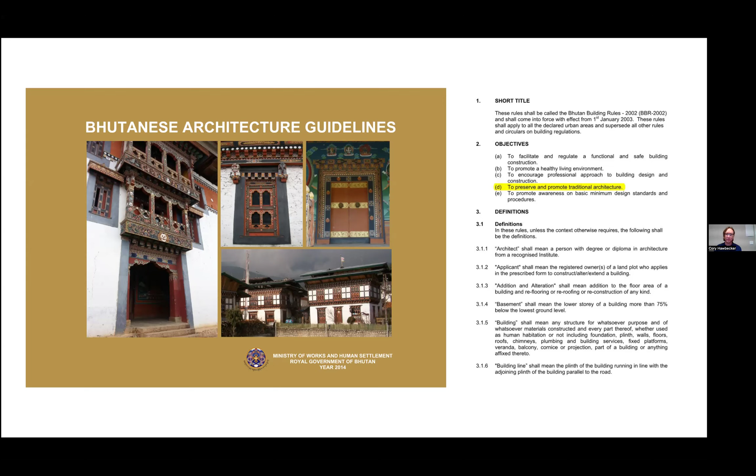The architectural forms are really these massive battered walls at the base, made of stone masonry or rammed earth, with smaller punched windows in them. And then on top of and to the side of - a lot of times you'll see at the top, this top story is all timber framed. So inside of the masonry walls, all the floors are timber framed, and that kind of pops out and explodes in certain ways on top of, or in the case of the monastery, there's a projection to the side of the rammed earth masonry, or stone masonry wall.

And above that is what's commonly called a flying roof. It's a roof form that extends out quite a bit past the perimeter of the building. And what's unique about it is a lot of times there's a lot of layering, which isn't unique to Bhutan—you see that a lot around Asia. But what's unique to Bhutan, I think, is that the roof is elevated above the ceiling of the top floor, and air can flow above that.

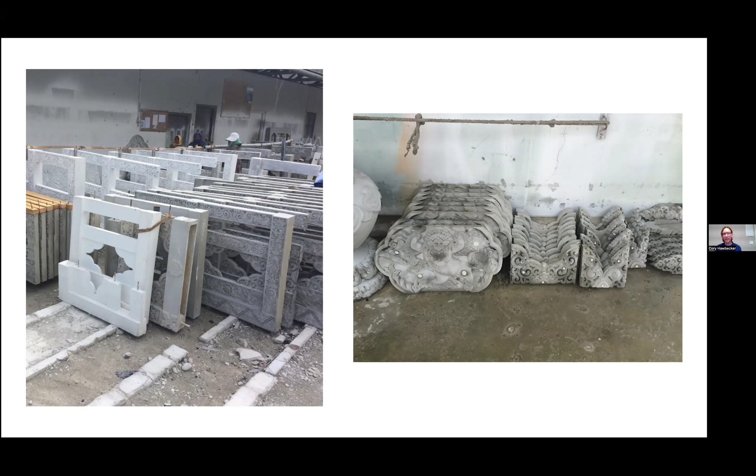All of that is sort of being supplanted commonly in the country by more modern techniques. So here, instead of actual carved wood, there's a lot of fiber reinforced concrete panels being made and put onto buildings. They're also adopting new construction techniques for the whole building—instead of masonry and timber, it's a lot of reinforced concrete frames with masonry infill, and then they stucco over that.

But as it impacts what we were doing, I had mentioned earlier that the impetus behind this was the foundation's desire to help Bhutan adapt to climate change. A component of that for much of the country is that it's kind of a colder climate. They don't really insulate their buildings. They use a lot of single pane glazing. They're really not familiar with using sealant to seal up gaps. So they've got drafty, cold buildings.

And our thought was that in working with them on the library, we can kind of move the needle in terms of sustainability and sustainable construction techniques with this project. So trying to use as much as we can of what they're familiar with and what's efficient there, but also layer on another component of insulation, air sealing, and efficiency.

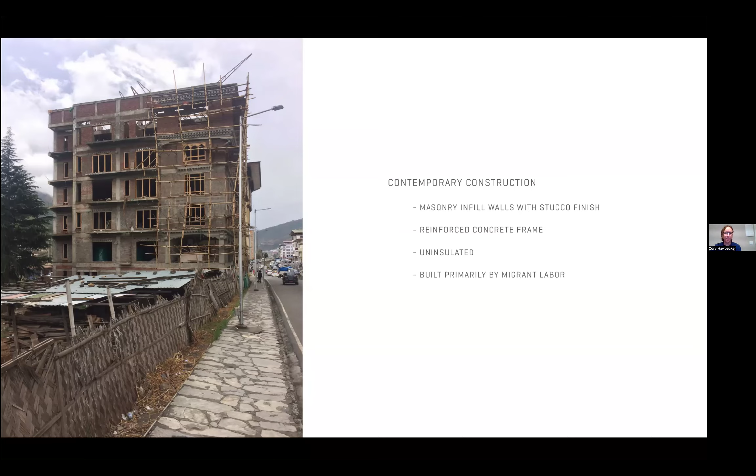So I mentioned the newer techniques—this is becoming very commonplace throughout the country. They're urbanizing quite rapidly, so they're building tons and tons of these apartment buildings with essentially uninsulated envelopes. They're also incorporating a lot of elements from India predominantly, like this mirrored glass, which really isn't effective in this climate, but it's readily available.

I encountered this especially when we were starting the project, trying to source insulation materials. Well, they bring in a bunch of salespeople from India, and they're not familiar with what we're looking for, so they're bringing us duct liner and stuff like that instead of proper insulation. So it's a lot of working with what's available, what's at hand, and what can we do. That was kind of a challenge for this project.

So, in summary, they have a strong desire to be sustainable, but they're not building very sustainably right now. This was an opportunity to elevate or do something new in the country and get people familiar with these techniques. The client we were working for had constructed a passive house and is really a believer in that technology. But Passive House is just kind of a component of a universe of high performance building techniques—that was our mission, to deploy those technologies in this project.

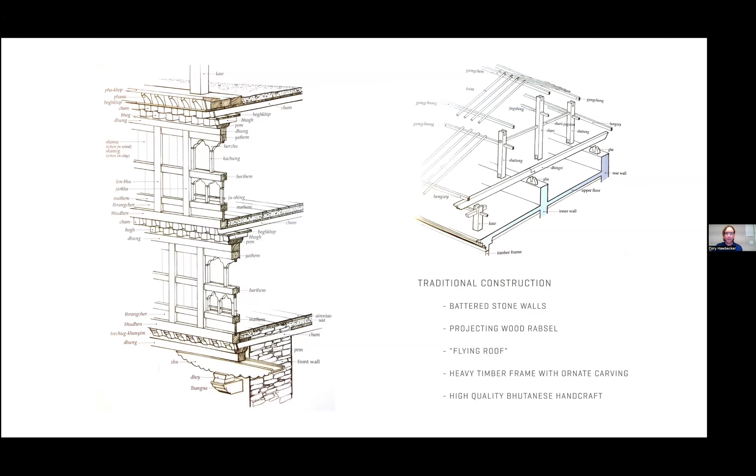So we wanted to, as much as we could, emulate those sorts of things, but implement, like I said, layers of insulation and air sealing techniques. So a lot of the early process was just me doing sketches about how that could happen.

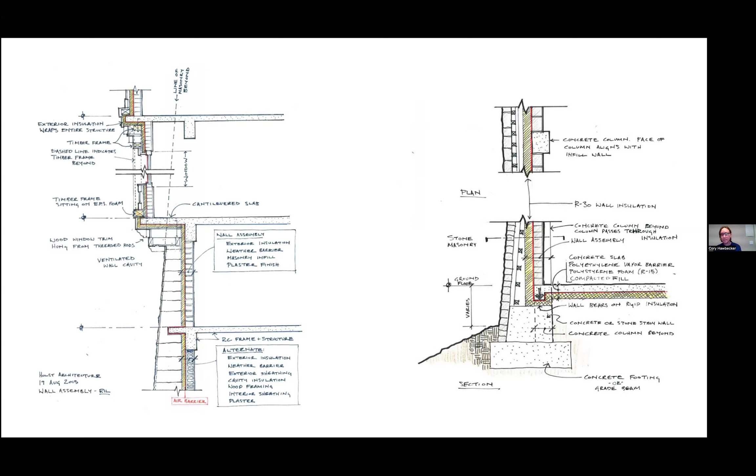So again, lowering the bar for them—still using reinforced concrete frames, still using masonry infill, and doing the things that respect the architectural heritage, like the battered walls and projecting wood framing. But hidden inside all of that, we try to sneak in a layer of insulation and air sealing. So there's a lot of back and forth with sketches, like 'can you do this?' and 'do you have that available?', working through those problems with them.

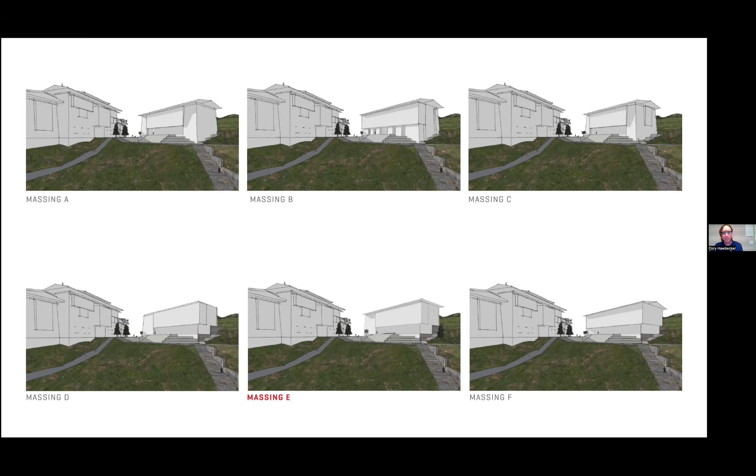Ultimately, they started building phase one, and we were asked to design the library, which is a standalone component. So we fell back on how you do high performance building—just look at the massing first and strategize around shading and positioning. Here are some images of that, and then I'll talk a bit about the detail of how the guts of the building work, but just touch on some exterior images here.

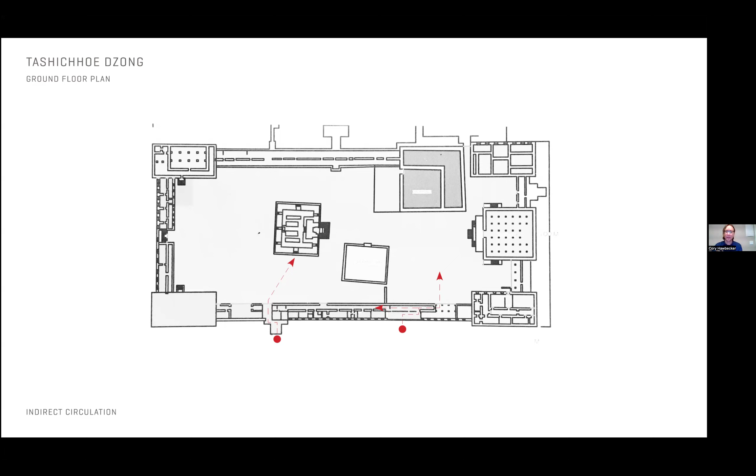When it comes to how the building is configured, we took inspiration from the dzong, the administrative monastery-fortress, as I mentioned before. As you enter these dzongs, there's never a straight route in—there's always a circuitous path because of its nature as a fortress; you don't want a big open gate into the building. Looking at that, there was some congruency between how a library operates and how a fortress operates—you don't want people just walking in, grabbing books, and walking out. There's always a control point, and we took advantage of that in the floor plan here.

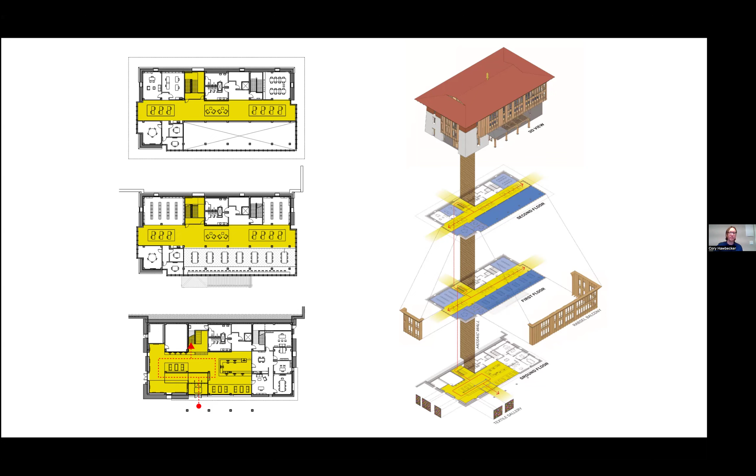Another component of the cultural inspiration we looked at was the tradition of Bhutanese textiles. They do a lot of really beautiful textile work, oftentimes done by women, and one of our drivers was to celebrate that and shine a light on what they're doing. So on the ground floor there's a textile display showing some really beautiful works, but we also tried to weave that in—pun not intended—to some of the elements we put into the design.

Also, in addition to some of those textile patterns, you see a lot of really ornate painting and decorative work on buildings, so that was another source of inspiration.

The way that manifested itself in the building was what we ended up calling the mosaic wall, adjacent to the stair that runs through the building. You can see it here on the left - it's a series of blocks of 4x4 end cuts of wood attached to the wall in a repeating pattern that goes up the entire height of the stair. With the way the shadow hits it, it really emulates some of that patterning of the textiles.

Another element we looked at a lot was the carpet of the reading room. On the right here you'll see the double height reading space, and we looked at different patterns for that. Because the materials available there are limited by what they can get from India, we found a carpet manufacturer with a selection of carpet tiles we could work with and created our own pattern. The furniture unfortunately obscures the most interesting part, which is in the center - it's red and orange around the perimeter and builds up to more turquoise and purple in the center.

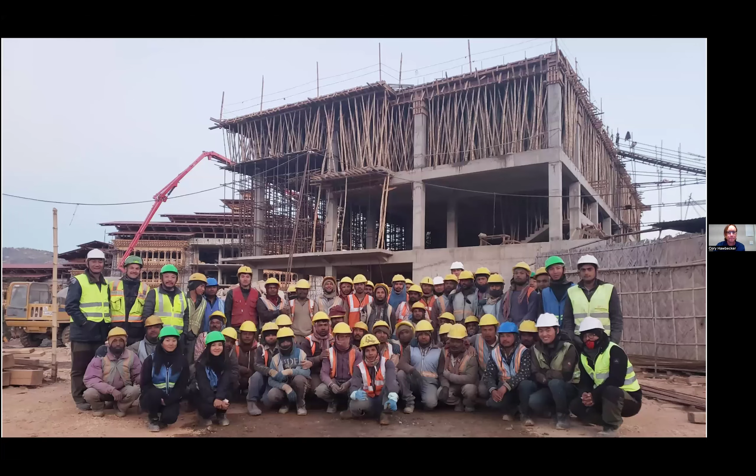I did want to call attention to the workers and the Bhutanese who helped us on this. It certainly wouldn't have been possible without their advice. There were technical advisors present throughout the process hired by the foundation I worked for, but also a whole myriad of amazing Bhutanese workers. They had architects who worked for the law school who connected us with traditional design experts, and they would provide feedback on our design moves and how the details worked. The proportions of all those elements you saw are very strictly dictated - this needs to be 2x1, this cornice is assembled this way. So their help on that was invaluable.

But I also wanted to call attention to the workers and really celebrate them. They built this through the pandemic in really pretty brutal conditions. The Bhutan lockdown was very severe, and they persevered through it all and really came through and built an amazing, amazing building.

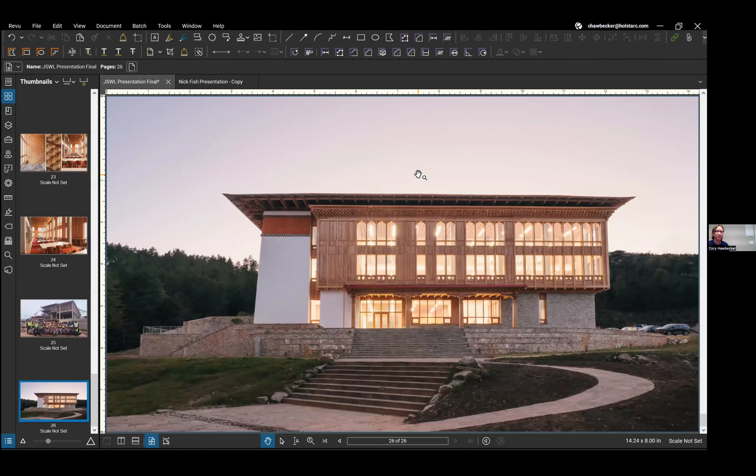My name's Josiah Henley. I'm a senior associate here at Holst Architecture. Back in starting 2016, Cory and I, with some others in our office, had the opportunity to work on this really interesting, challenging, and wonderful project called the Nick Fish. I'm just going to spend a little bit of time talking about this building and that process.

For those who don't know, it's an 86,000+ square foot multifamily housing project located in the Gateway neighborhood. The partners on the project were our Just Future, formerly known as Human Solutions, Edlin and Company, and Prosper Portland. We worked closely with LMC Construction, who built the project, KPFF Civil Engineers, Place Landscape Architects, MFIA MEP Engineers, and Catena Structural Engineers.

The project is 75 housing units, a mix of both affordable and market rate - 52 affordable units in this building and 23 market rate, a mix of studios, 1-bedrooms, and 2-bedrooms. The building also serves as the office headquarters for our Just Future. The office is 10,000 square feet, and there's also about 9,000 square feet of retail space operated by Prosper Portland, which prioritizes BIPOC small businesses in that retail space.

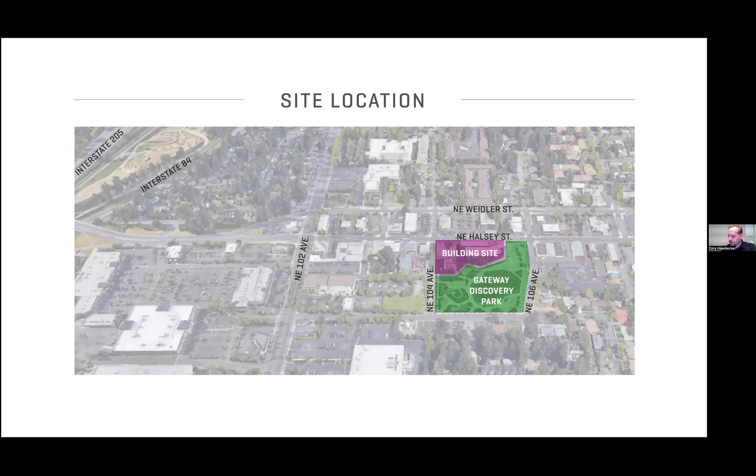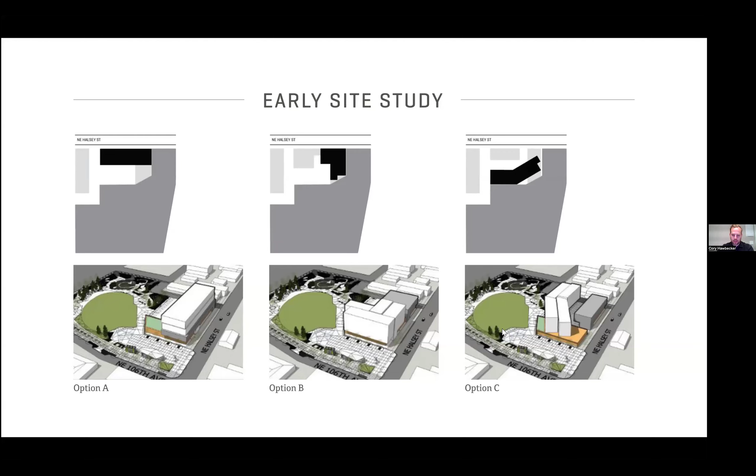One of the complexities of the project is how do you design for a site that basically has 3 main facades. It's a 4-sided site. You really want active program on all 3 of those 4 sides. And so how do you accomplish that? And what we ended up with was something similar to what you see in option C, which was to locate the office and retail along Halsey Street and sort of in a lower massing that's more appropriate to the neighborhood, and then locate the housing portion along the park side to sort of get more eyes on the park and screen some of that interior parking.

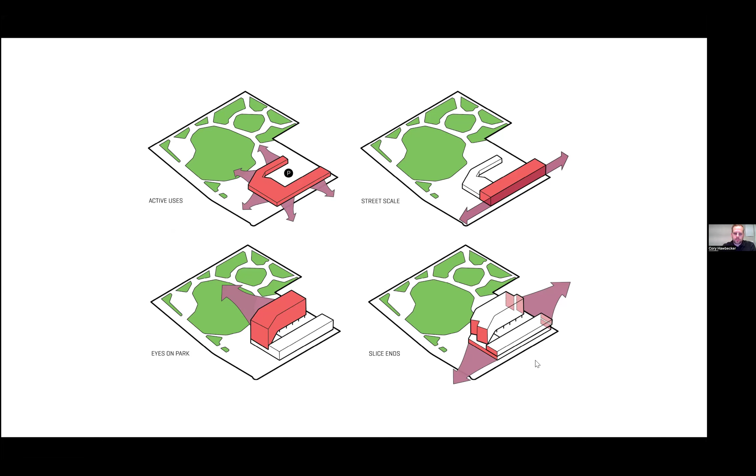So this is just a diagram that explains those different challenges and how we sort of attempted to solve those. You can see active uses on 3 of those 4 sides - that's retail, amenity spaces, and bike parking, trying to screen that parking from the park. The massing that's located on Halsey is sort of at street scale, a lot of 2-3 story buildings, and so the lower part of the massing that has the office is located there. I mentioned eyes on the park - the housing massing was pushed to the backside facing the park, and then sort of the ends respond to what's happening adjacent there. There's a public plaza here on this would be the northeast corner of the site. And so the building sort of breaks down and responds there programmatically.

So just jumping into the plans to give you a better idea of how the building lays out here. You can see there's a real effort to try to create a lot of active use along park edges and the street. At the top is Halsey Street, where a lot of the retail is located. Retail number 3 is located along the plaza here, and then we wrap amenity spaces for the residents towards the back of the building.

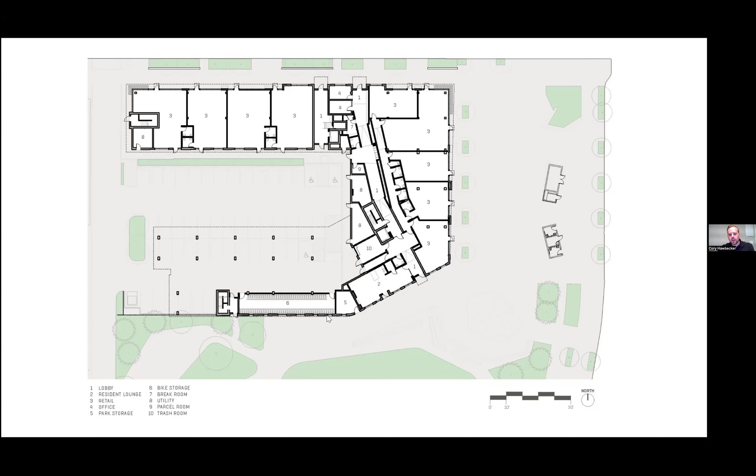There's also shared storage to be used by Portland Parks in our actual building, sort of adjacent to the bike parking here.

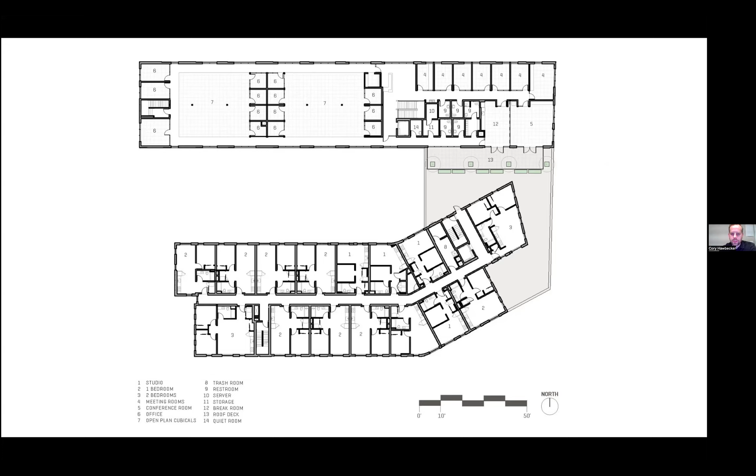Going back a couple slides here, you'll notice in the background these large mature trees on the edge of the park that are very noticeable when you're in the park. They're bookending one side of the park and creating a backdrop. Our building was on the opposite end of that, and we wanted it to act as that other bookend, creating a backdrop as well.

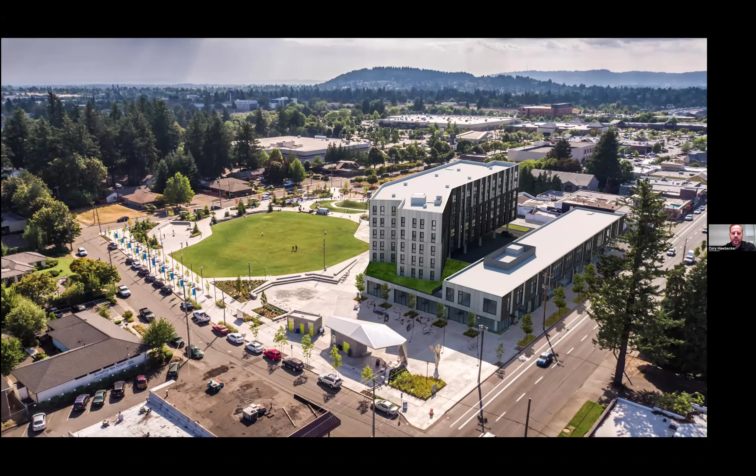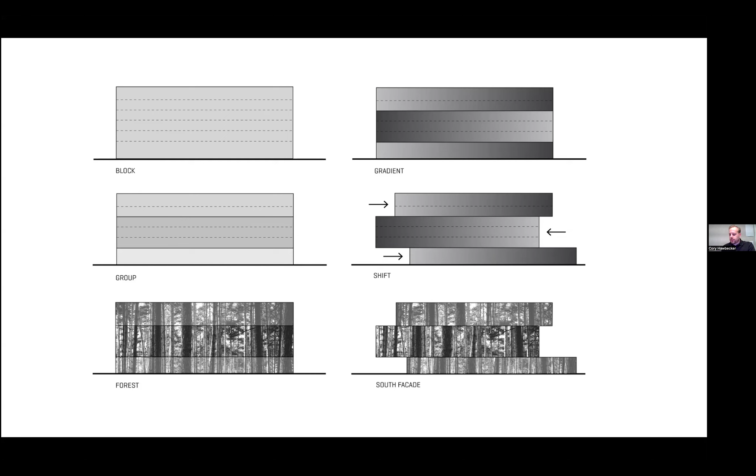Using those large trees as inspiration, we came up with a patterning for the facade that mimicked that vertical patterning and shifted it with the massing of the building to create patterning with windows and facade materials. Those materials are textured brick and reflective metal panel, used to create that patterning.

As you move around the backside of the building and get to the plaza, that materiality breaks down and the building becomes quieter. That was intentional, responding to the program of the plaza, which has markets, concerts, and other events. So the facade quiets down to act as a backdrop for that active space and where the retail is located, with the building becoming a backdrop there.

Moving to the interiors, one of the really neat things about this building is there's a consistent level of finish in the units across all units, both market rate and affordable. This is really important to our team, both in terms of equity—I think everyone deserves the same level of finish—but also it's helpful for the owner, because if the unit mix between affordable and market rate changes, they can move those around the building and it's still the same unit.

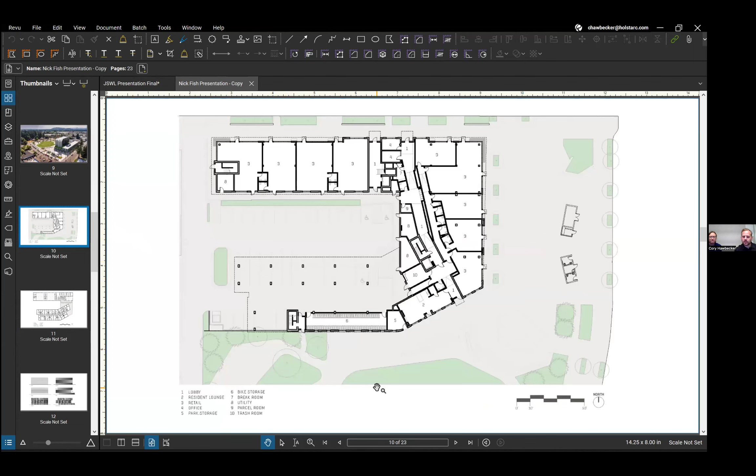Our hope is that being on the park, it's sort of lively and activated. We do have a door that opens onto it. I think we originally envisioned a larger physical connection, but that was really challenging in terms of security, being on a public park and not being able to control that access point. We would love for it to just be a large opening with people filtering in and out of that space, but logistically that was really hard, especially being so far.

You can see in this plan, the offices are along Halsey at the top there, and that's where a lot of the Home Forward property management staff is located. It's very far from the community room, so I think that's a challenge. It's more successful in projects when it's closer to staff in the building. So that was something that was kind of a challenge on this project.

But yeah, hopefully that answers your question. I don't know the metrics on how much it's being used — I think that would be a great question to ask our Home Forward about what they've seen in terms of use in the building. Do you think the position of the building also makes it a little more challenging because it's on the ground floor and all the housing's above?

Yeah, potentially. It was put there as a way to bridge the connection between the park and the residents. Kind of curious—we should maybe do a post-occupancy evaluation and find out how much it's actually being used, and why or why not.